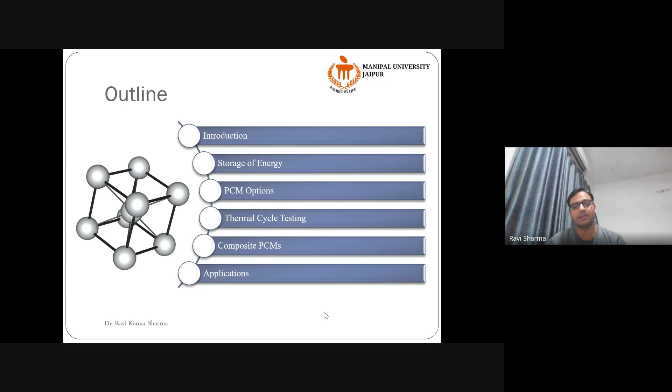This particular presentation has been structured into these few things, as you can see on the screen. I'll briefly introduce this area, tell you what storage of energy is, why it is important, and then the PCM options — PCM stands for phase change materials. I'll tell you what these are and how we use them, then thermal cycle testing of these materials, then composite PCMs, and then the applications of these materials.

A little brief of my workplace: I am currently working with Manipal University Jaipur as professor and head of the mechanical engineering department. This university was established in 2011 in the outskirts of Jaipur, and currently has more than 16,000 students on campus, more than 700 faculty members, plus 300 non-teaching staff and other people. This university has seen tremendous growth over the last decade.

This university belongs to a family with an educational background of more than 70 years. We are part of the main Manipal group, which is in the Udupi district of South Karnataka, near the coastal area. Currently, Manipal Group has many universities: three in India, one in Malaysia, one in Dubai, one in Nepal, and one in Antigua — the American University of Antigua. The Manipal Group is famous for medical and other educational institutions, so we do not have medical on this campus, but we do have science, engineering, and other aligned streams.

We do have many research infrastructures available in the university, but I'll not be speaking on them.

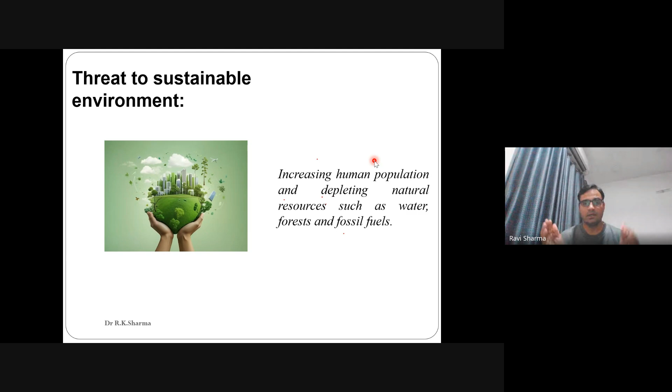So I would say that availability of renewable energy, or the utilization of renewable energy, and the storage of that available energy when it is available, and utilizing it when it is not available - if we club both of them, then we get environmental sustainability. So environmental sustainability can only be achieved when we have a combination of renewable energy sources and energy storage.

Energy storage can be mechanical, chemical, or thermal. A simple example of energy storage is your own mobile phone or laptop. The mobile phone has a battery. You charge it in the morning and use it throughout the day. How? Because it has an energy storage device - a battery. So the battery is an electrical energy storage device.

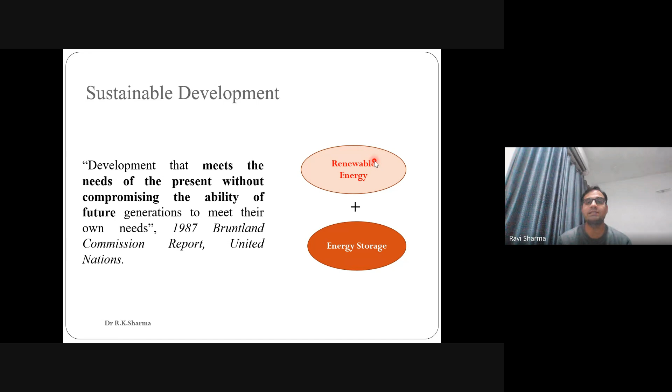During this lecture, we will be talking about the thermal energy storage part. But energy storage is energy storage - we must be able to understand that. So as I said, sustainable development can happen only when we club renewable energy and energy storage.

In order to achieve this sustainable development, in September 2015, the United Nations gave 17 goals to the world to achieve by 2030. World governments are bound to achieve these goals by 2030. I'll not be discussing all these sustainable development goals, but I'll just tell you one thing: whatever research you are doing, you are addressing, directly or indirectly, at least one of these sustainable development goals, primarily known as SDGs.

So you will find these SDGs everywhere these days. Remember that whatever you are contributing, whatever research you are doing, you are actually contributing towards a sustainable development goal, directly or indirectly. Before understanding the thermal energy storage part, we must understand the very basic idea of thermodynamics.

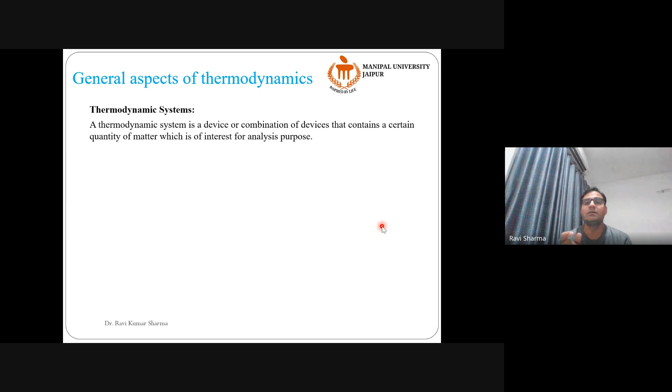I'll not take much time on that. We know that thermodynamics is nothing but the science of exchange of energy. When we talk of exchange of energy between two systems, or between system and surrounding, we need to understand what are the different types of systems available. There are three types of systems that we generally analyze in thermodynamics: closed system, open system, and isolated system.

The closed system is something in which energy gets transferred between the system and surrounding, but mass doesn't. For example, I have a cup of tea with me at the moment, which you can see. After some time, the energy will transfer out of it - this tea will get cold, but the amount of milk will remain the same for quite some time. So that means it is a kind of closed system.

An open system is something which allows both energy and mass transfer, and an isolated system is something which doesn't allow anything to get transferred. That is your thermos, in which you keep hot water or hot milk for a longer period of time. Although it has some conductivity and the energy gets transferred after some time, you can still keep it hot for a longer period.

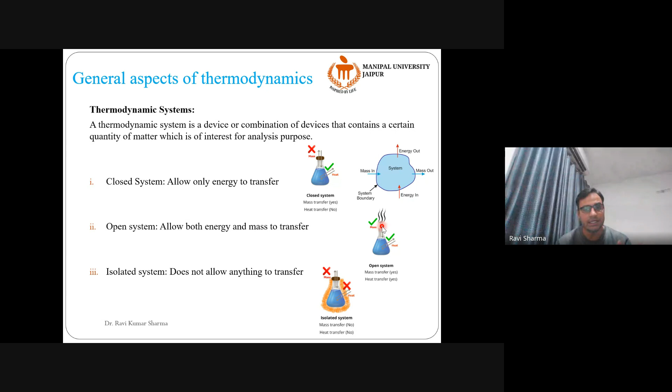So in continuation to this, what is thermal energy? When thermal energy is transferring between system and surrounding, or between two systems, this calculation of energy is very simple. You can calculate using this expression: E equals mc delta T, where delta T is the temperature difference between these two objects, m is the mass, and C is the specific heat. So this is a simple calculation I wanted to bring to your notice.

This thermal energy can be transferred in two ways: either as sensible heat or as latent heat. Sensible heat is something that we can sense - for example, we are increasing the temperature of water, and we can sense the hotness or coldness of the water. That is called sensible heating or cooling.

But when there is no cooling or heating, there is only phase change - meaning there is some hidden heat requirement to change the phase of the system. That hidden heat is generally known as latent heat. For example, the melting of ice, or the solidification or freezing of water kept in the freezer of the refrigerator - we keep the water in a tray, and after some time the water converts into ice. So the conversion of liquid to solid, or solid to liquid, or liquid to vapor, or vapor to liquid - wherever a phase change phenomenon occurs, there is a requirement of latent heat.

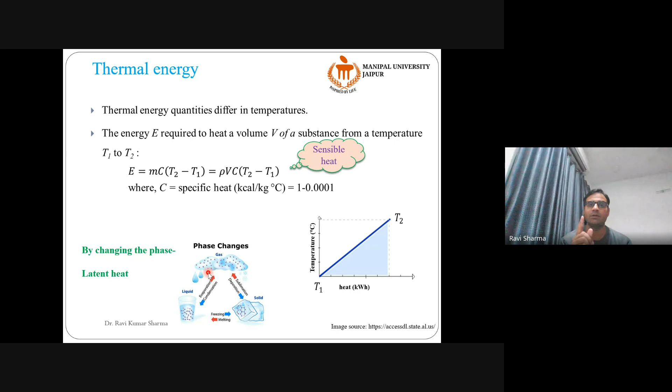So the heat can be transferred either as sensible heat or latent heat. There are materials which are able to absorb or store sensible heat, and there are materials which are capable of storing latent heat.

For example, take a simple rock or piece of stone. If you keep it under direct sunlight, after some time it gets hot. You have definitely experienced this in your life, that when you keep a small stone outside your home on the rooftop in summertime, after some time it gets warm, hot actually, very hot. That means it has stored some amount of sensible heat.

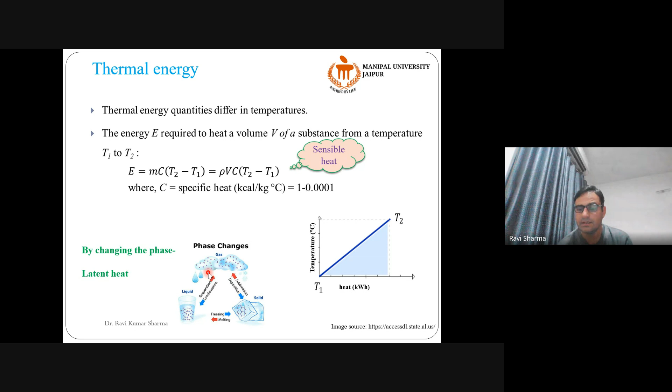Latent heat you have seen in your life many times by converting ice into water or water into ice. So we'll take this concept of sensible heat and latent heat, and I'll tell you how this thermal energy storage comes into picture, how we get the idea of it. Once you know what thermal energy storage is, you can understand the materials for thermal energy storage. So I'll spend two minutes on this before moving to thermal energy storage materials.

This classical example I have taken from the thermodynamics book written by P.K. Nag. The intention is to convert minus 15 degrees centigrade ice into 150 degrees centigrade vapor. When you want to do that, there are some phases or stages involved.

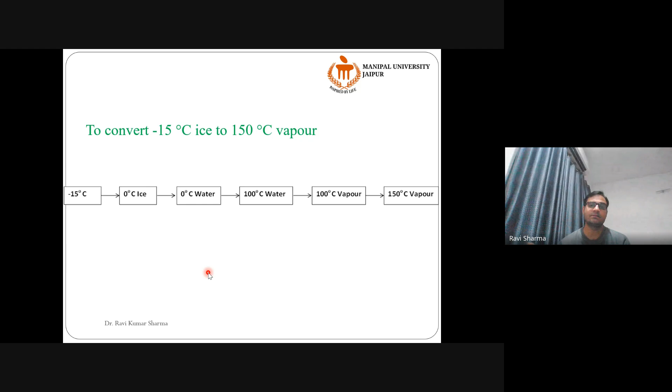These stages are: first, convert minus 15 degrees centigrade ice into 0 degree centigrade ice. Then this ice is converted into water at the same temperature. Then this water is converted into 100 degrees centigrade water. Then 100 degrees centigrade water is converted into 100 degrees centigrade vapor. And then 100 degrees centigrade vapor is converted into 150 degrees centigrade vapor.

So what are the different types of heat involved in this entire process? We'll see one by one. From minus 15 to 0, it's a sensible heating process because we can sense the hotness and coldness of it. So sensible heat will be required.

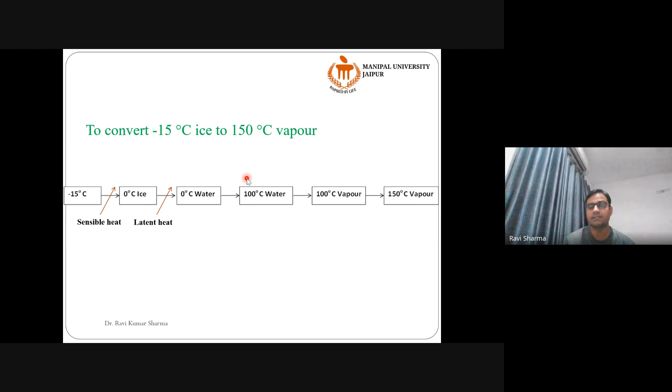But for converting ice into water at constant temperature, we require latent heat. Then from 0 degree centigrade water to 100 degree centigrade water, again sensible heat, then latent heat, again sensible heat. So you can have a look at it for a moment and understand where sensible heat is required and where latent heat is required.

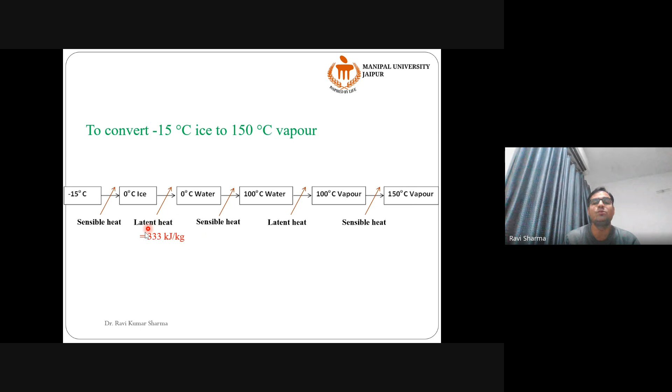Now if you do a simple calculation, the conversion of 0 degree centigrade ice into 0 degree centigrade water will require 333 kilojoule per kg of heat. If you do a very simple calculation, from 0 degree centigrade water to 100 degree centigrade water, you can use mc delta T and calculate the value of amount of heat required.

Now I have done a calculation for converting water from 1 degree centigrade to 80 degree centigrade, and the amount of heat required is 332 kilojoule per kg. So what you can see here, this latent heat is equal to this sensible heat. That means if by any means I could store this much energy, later on this energy can be utilized for heating water from 0 degree centigrade to 80 degree centigrade.

And since it's wintertime, you've observed that we all need hot water for almost every purpose at home: for cleaning, for bathing, for utensil cleaning, for washing clothes. We need hot water for everything. And the temperature we require for bathing is not more than 45 to 50 degrees centigrade, which is even a lot.

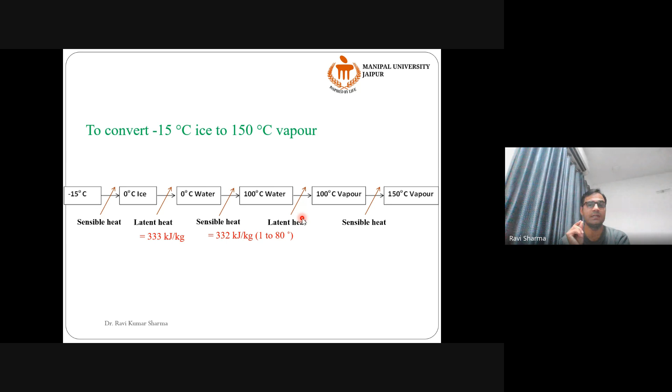For cleaning, we don't require a temperature of 60, 65 degrees centigrade. For washing also, we don't need that much temperature. That means if by any means we could store this energy, we could do all our household jobs by warming or heating up the water later on.

So this actually triggered in the scientist's mind: why can't we store this energy, because this much energy is required to heat up the water from 0 to 80 degrees centigrade. So let's store it. It might have been a vague idea when it came into their mind, but now it is not at all a vague idea.

People are actually doing it. We all are doing it.

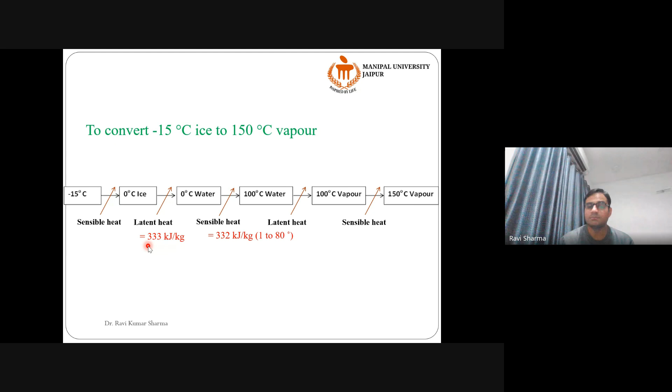So here the idea of energy storage comes into picture, and there are three types of energy storage: sensible energy storage, latent energy storage, and chemical energy storage. Sensible energy storage works by elevating the temperature, latent heat storage by changing the phase, and chemical heat storage by exothermic and endothermic reactions. For example, wherever a chemical reaction is happening, some heat is emitted from this reaction—that's called chemical heat storage.

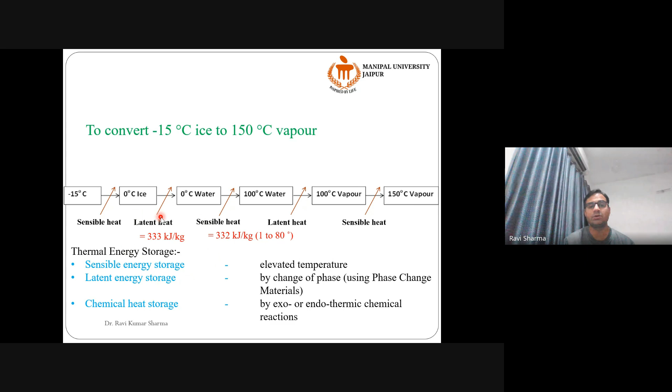So why do we need to store energy? We could understand that there is a possibility to store and utilize this stored energy, but why do we require, why do we need to store the energy?

This you can understand with this example. Just think about how much temperature your body requires in general. In the summer, when temperature goes beyond 35 degrees, we start feeling hot. In the winter, when temperature dips below 20 degrees centigrade, we start feeling cold. That means there is a temperature range in which we all feel comfortable. Generally, this temperature range is between 22 to 26 or 27 degrees centigrade. If the temperature drops below 22, we feel cold. If the temperature goes beyond 27, 28, we start feeling hot or warm. So that means there is a temperature range, and this temperature range I have kept

Now imagine the month of November. What happens in the month of November? In the month of November, days are very hot, the nights are cold. So it so happens that in the daytime we are using air conditioner and fan sometimes, but in the morning time we are using a geyser. We are using hot water for bathing, but in the daytime, for body comfort, we use the air conditioner because the temperature is very high. Because the night temperature is around 20 degrees centigrade, the day temperature is still around 35 degrees centigrade.

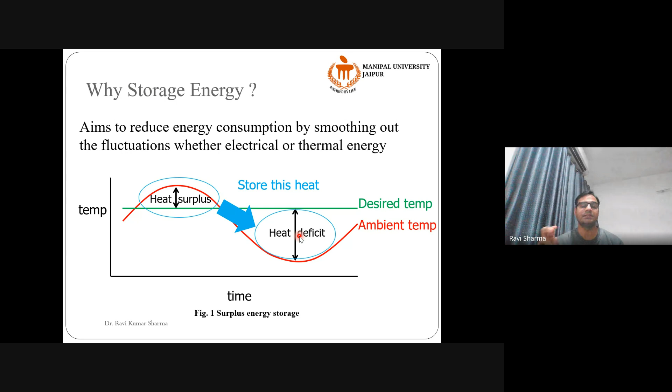So there is a huge temperature variation, which you can follow with this red line. The temperature increases in the daytime and decreases at night. So in the daytime we have a heat surplus which we don't require at all, but at night time there is a heat deficit because in the morning and at night we feel cold. So there is a heat deficit. Now what to do? Can we store this heat surplus available in the daytime and utilize it at night time? There the concept of thermal energy storage comes into picture, and that's how thermal energy storage becomes important.

So it is the same thing—why do we need thermal energy storage? We need to match energy supply and demand. We need to do peak energy saving, and ensure flexibility of the system. We can use the system many times, but there are some parameters we need to look into when installing thermal energy storage. We need to check its quality, the capacity of energy it can store, the energy density, and the power it can give us.

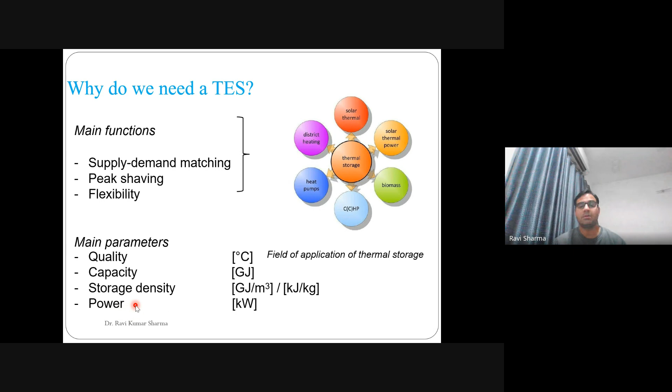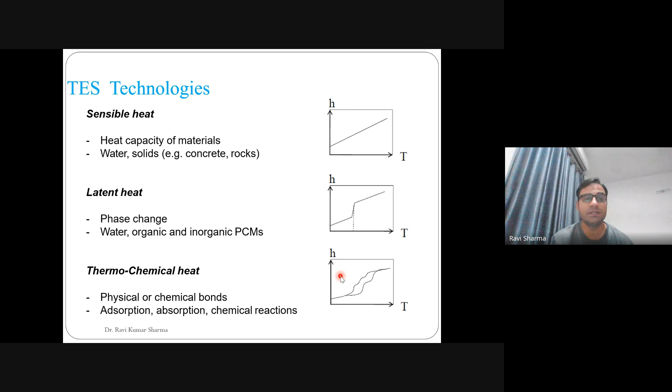So we have already discussed how sensible heat is denoted on the curve, and how latent heat and thermochemical heat are denoted—so it's a repetition of these things. Now, as I was mentioning, when we heat up something, it requires some sensible heating, then latent heating, and then sensible heating again.

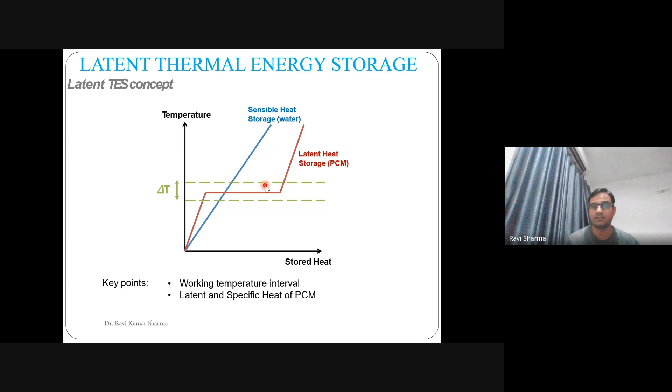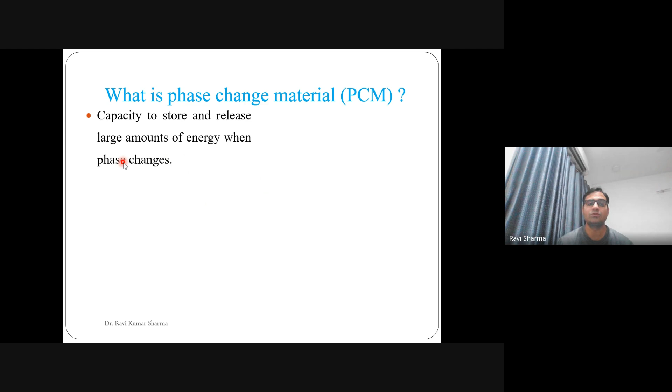So there is a portion wherein the phase changes. There are materials which are able to store energy while changing their phase. For example, ice—when we heat up the ice, it melts and changes its phase from solid to liquid by absorbing some amount of heat. So water, as a material, is able to store some energy. We call these energy storage materials, thermal energy storage materials, or materials for thermal energy storage. In generic terms, they are known as phase change materials. So the materials which change phase and store energy also change phase and release energy. They have the capacity to store and release a large amount of energy when they change phases. So look at this diagram.

This blue hemisphere, or blue circle, blue bowl—whatever you want to call it—the blue color shows the solid, and the yellow shows the liquid. So blue denotes solid, yellow denotes liquid. The solid is being converted into liquid in the first phase, and in the second phase, the liquid is being converted into solid. When the solid converts into liquid, it stores energy. When the liquid releases its energy, it becomes solid.

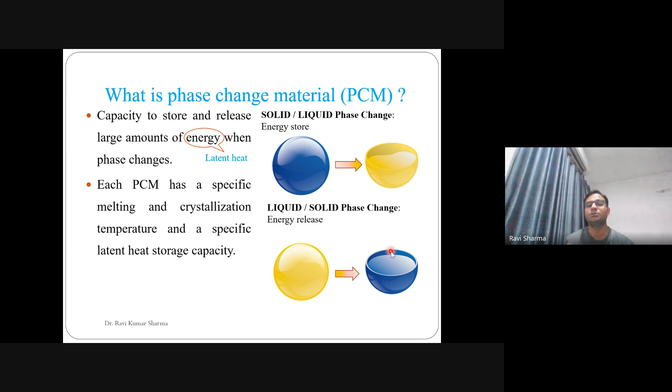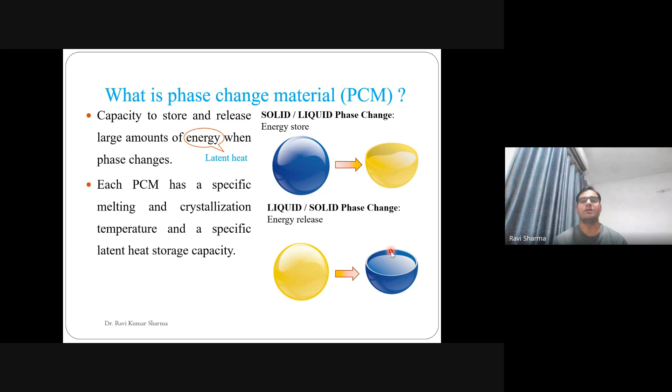The same thing happens in the case of water and ice phase change. The water releases its energy and converts into ice. The ice stores the energy and converts into liquid. So energy storage and energy release—it does both. That's why we call it phase change materials. Similar to ice, there are many phase change materials. We'll see some of them and what kind of analysis we do on these PCMs, one by one.

There is a big classification of these PCMs. PCMs are classified as solid-liquid, liquid-gas, and solid-solid. Solid-liquids are the most popular PCMs, classified as organic, eutectic, and inorganic. Organics are paraffin, fatty acids, alcohols, esters, and others. Inorganics are generally salt hydrates. Solids are polyurethane, polybutadiene, and others. We generally don't deal with solid-solid PCMs; we deal with organic and inorganic.

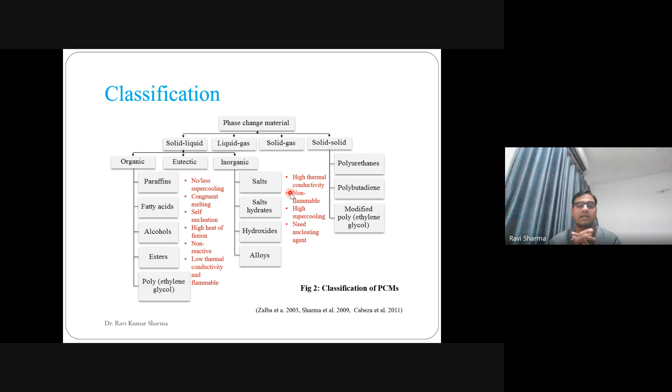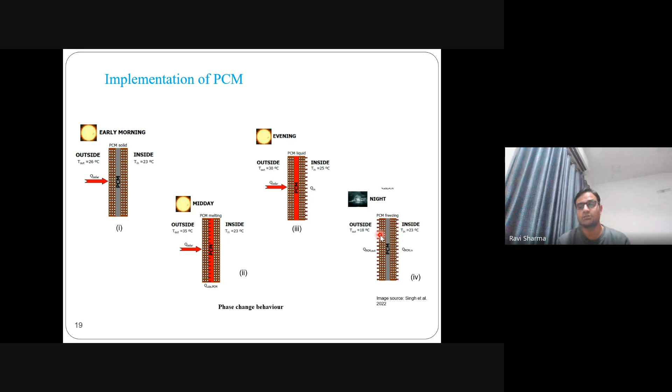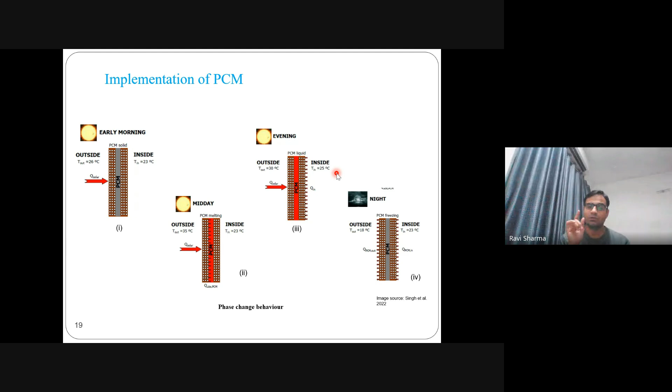The PCM will release its heat and convert into the solid phase again. So we started from solid phase, liquid phase, then solid phase again, and the cycle repeats: one, two, three, four, one, two, three, four. This is the cycle of PCM - it melts once a day and solidifies once a day, and that's how PCM works.

There are different types of organic and inorganic PCMs. PCMs can be utilized as either single or mono PCMs, or we can also prepare eutectics of them.

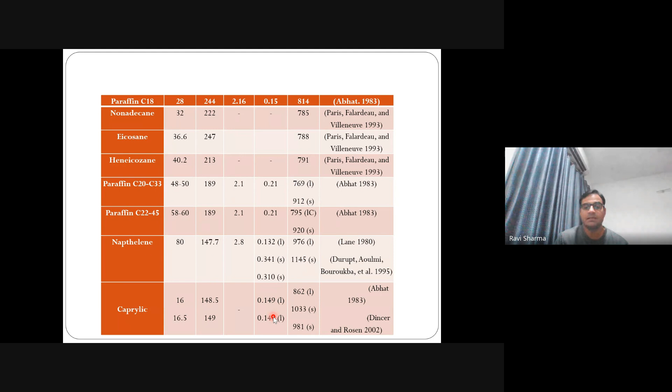You can see some organic materials and their properties shown here: their melting temperature, their latent heat of fusion, their specific heat, and their conductivity. You can see the conductivity is very low. Water, an inorganic material, has conductivity of 0.6. Octadecane, an organic material, has conductivity of 0.15. So the conductivity of all organic materials is very low - paraffin 0.2, naphthalene very low again, caprylic acid very low again, and all of these are organic materials with very low conductivity.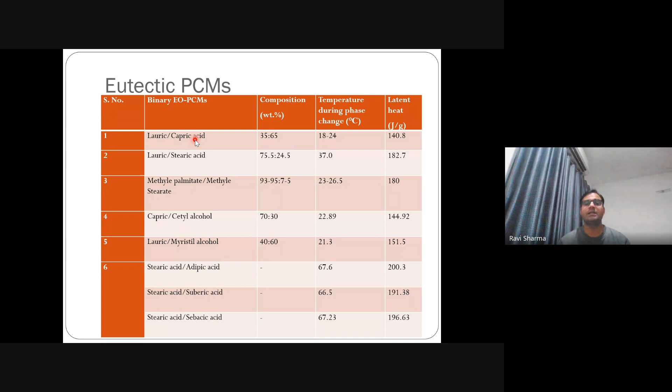PCMs can also be prepared as a eutectic - we mix two or three PCMs to come up with one single material, in order to tailor their melting point. For example, suppose I have two materials available at two different melting temperatures, one at 40 degrees centigrade, another at 45 degrees centigrade. But my application requires a material with a melting temperature of 42 or 42.5 degrees centigrade - a very peculiar temperature that isn't available. So what we do is mix the two materials in different ratios until we find one with a melting point of 42.5. That's how we prepare the eutectic. It can be binary, ternary, or more, depending on material availability and the requirement.

When utilizing a PCM, it must have certain properties: high latent heat, high specific heat, high thermal conductivity, high chemical and thermal durability, longer chemical stability, and it should be non-toxic, easily available, and inexpensive. These are the favorable properties it should have.

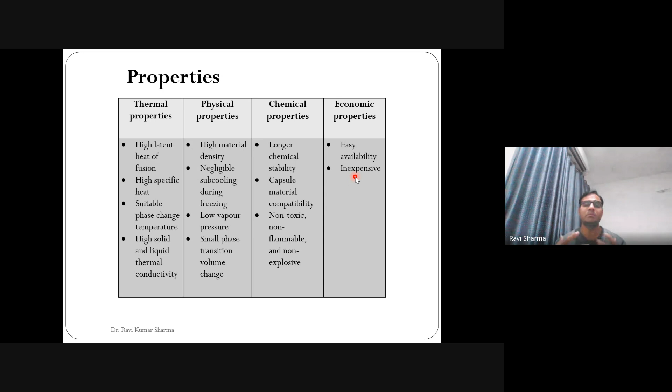Okay, now generally what we do with PCM - let me check the time, please. All right, we still have time. So,

First, we do thermal cycle testing of PCM. This is basically done to check their thermal durability and chemical durability. As discussed, a PCM will melt once a day and freeze once a day - so how long can we use these materials? When it changes phase again and again, after some time its properties will deteriorate. So how much depreciation it will experience is important - after one year, two years, or five years of use, what will be the latent heat, the melting point, and the conductivity of this material? This kind of melting and freezing treatment is done using thermal cycle testing, and for that we have developed an in-house tester at my current university.

The second part we work on is that organic materials have very low thermal conductivity, so some treatment is required to enhance it. One example is the nano-enhanced PCM, where we mix nanomaterials with organic PCMs to enhance their thermal properties. I'll show you one by one how we do that.

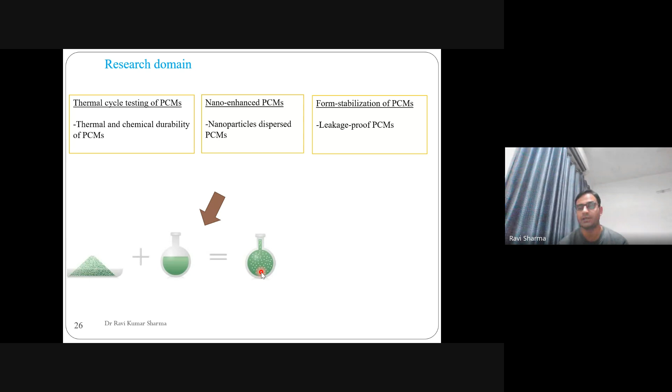Then for form stabilization, what we do is take a porous matrix, or a porous material. Into the pores of these materials, we add PCM by a rigorous mixing process. Once this PCM gets settled into the pores, after getting melted, the PCM remains in the pores. What you can see on the right hand side, we call FS-PCM, form stable phase change material. So when the material gets melted, the PCM is retained into the pores, it doesn't flow away, it doesn't come out of this material. Because of that, it is known as shape stabilized, because it keeps its shape retained, or form stabilized, keeping its form very much stabilized.

So we have tested a number of PCMs for that. We have tested various paraffin wax, palmitic acid, myristic acid, polyethylene glycol of different molecular weight. I have just added one here, but we have tested like 7-8 types of different molecular weight polyethylene glycol. We have also tested the esters that I'll show you. I'll show you some of the results for you to have an understanding of this PCM.

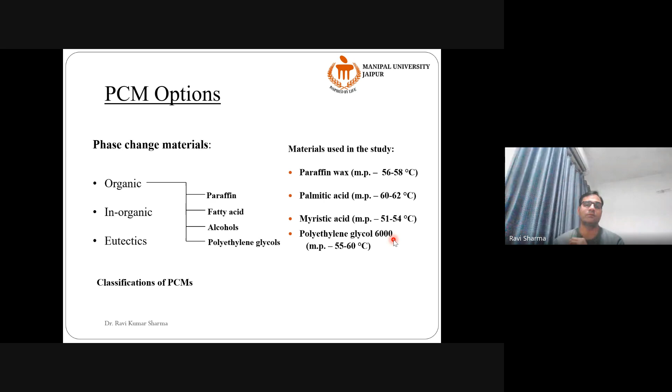The temperature was between 30 to 100 degrees centigrade. As I was mentioning, it will go from 30 to 100, 100 to 30 on its own, without any human intervention. So we did it for 1500 melting and freezing cycles non-stop.

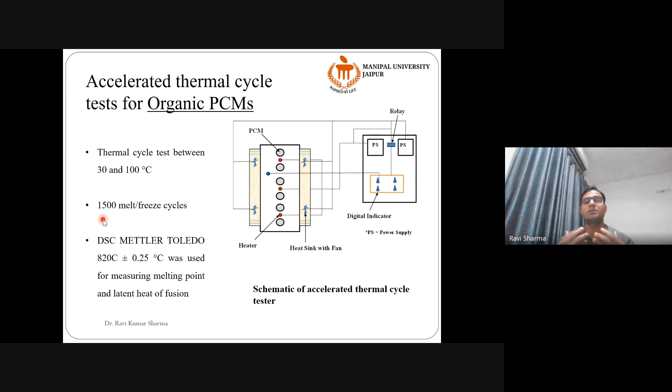It took around 2.5 months to complete this entire 1500 cycle. Then we tested using different machineries to analyze the effect of this thermal cycling on the thermal properties. So what thermal properties do we analyze?

As I said, one was latent heat and the conductivity and the chemical stability of these materials, whether the material was chemically stable or not after 1500 cycles. What happened to its chemical bondings, the functional bondings of these materials. We'll see that one by one.

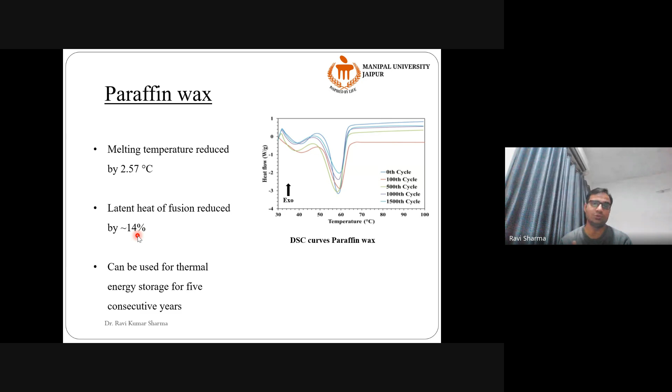Because this is the laboratory test, in an actual experiment this might be a little different. But roughly, we can say that 14% of its latent heat will go waste, will reduce. But 86% is still there. That means the material can be very well utilized or used for continuous or consecutive 5 years.

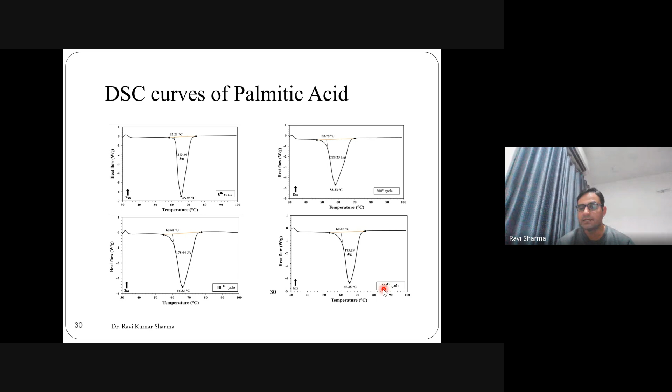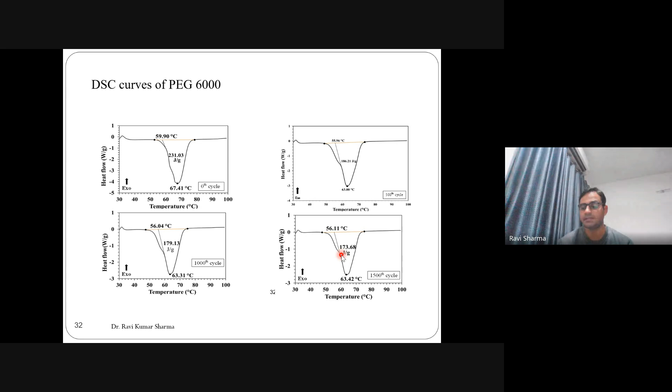I have tabulated these values. So now this gives you a comprehensive understanding of how thermal properties changed over the period of time. As you can see, the melting temperature of paraffin changed from 52.9 to 50.33, for PEG from 59.9 to 56.11, and so on you can see.

The variation in latent heat in the case of paraffin was from 133 to 114, that means 14% reduction. In the case of palmitic acid, it was 17.88%, roughly 18%. In myristic acid, only 0.64%, but in the case of polyethylene glycol, it is roughly 25%.

Now, as an application engineer, what do you want? You want your material to lose the minimum amount of latent heat after a certain number of cycles. And that's what is happening in myristic acid. After 1500 melt-freeze cycles, it loses just 0.64% of its latent heat. So as an application engineer, you can tell your customer that myristic acid is the best material out of these four because it doesn't lose its latent heat capacity over a period of 5 years. And polyethylene glycol is the worst material because it has lost 25% of its total latent heat capacity.

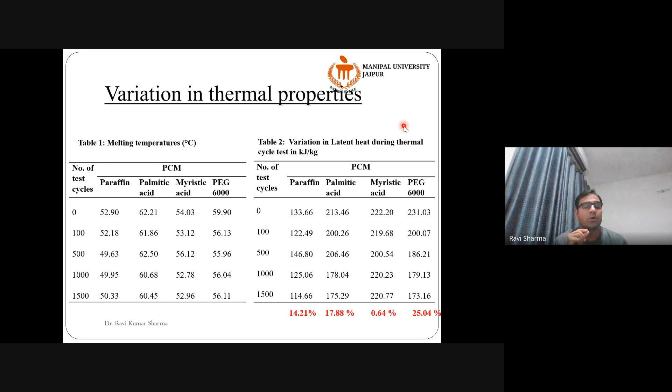That means, being a real application engineer, I can tell my customer that I am giving a guarantee that polyethylene glycol will definitely lose 25% after 5 years. But I cannot guarantee on myristic acid, palmitic acid, and paraffin because their behavior is like a sine wave - increases, decreases, increases, decreases. I cannot comment on its applicability and durability. So your customer will understand that PEG has trustworthy values. I can trust PEG. Now it's up to me whether I want to use it for a year, 2 years, 5 years, or 10 years. But I know that after 5 years it will lose 25%. Still, if I can manage with 75%, I'll go with it. But I cannot trust myristic acid, palmitic acid, and paraffin. So a real application engineer has to see the pattern of these values.

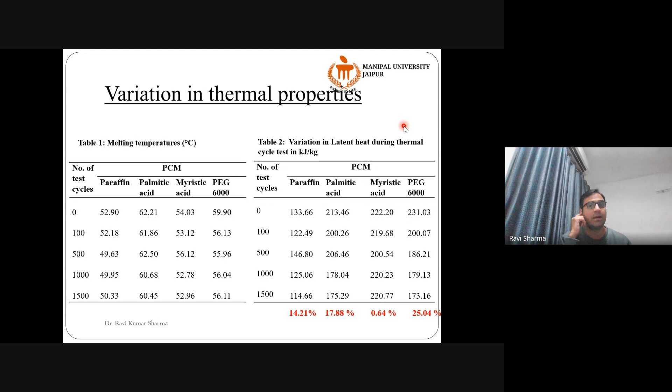These are FTIR curves - Fourier transform infrared spectroscopy. These curves basically tell us about the functional bonding of these materials. You can spend a few moments with it and see what is happening after 1500 cycles of each. I won't go into more detail because this is deep chemistry which might bother you. Just look at the peaks - you can see that the shape of peaks after 1500 cycles is almost similar to what it had at the 0th cycle. That simply means there are no changes in the functional behavior of these materials after 1500 cycles. Chemically, the material is very, very stable. Thermal stability we see here, chemical stability we see here.

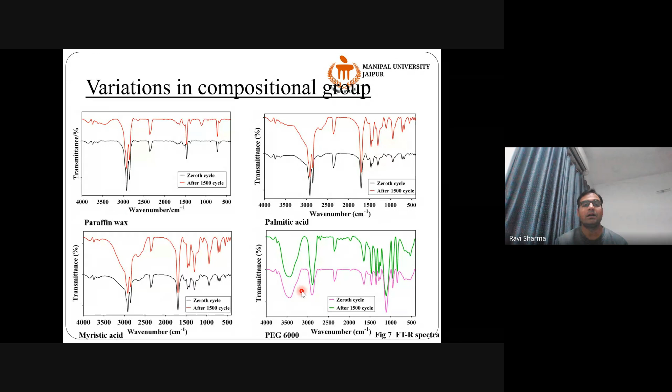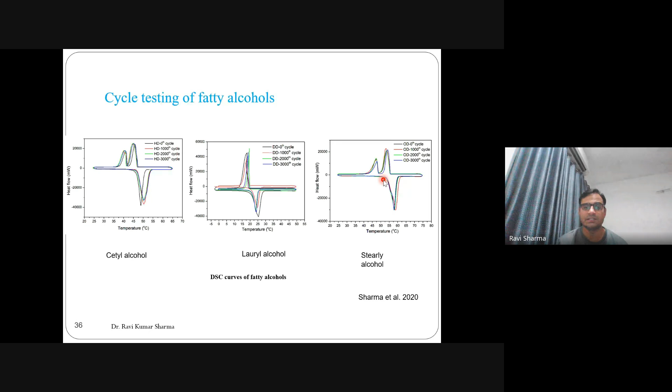We also did thermal cycling of fatty alcohols - cetyl alcohol, lauryl alcohol, stearyl alcohol - using the same setup for 3000 cycles. You can see that even after 3000 cycles, the variation in latent heat and melting temperature is almost negligible. So these are very, very good materials.

Now coming to the properties enhancement of organic PCMs. Organic materials have very, very low thermal conductivity. There are ways to enhance its thermal conductivity - we can add nanoparticles, we can develop form-stable PCM, we can do surface modifications, we can develop eutectic PCMs, we can also encapsulate them into a container or small capsules. So some of these things can be done for thermal performance enhancement of different PCMs. But we need to understand why do we need to do that? Why do we need to enhance the thermal properties or conductivity of a PCM?

To understand that, let me tell you one very basic thing. These days the temperature is pretty cold everywhere, especially in North India, the eastern part of India, and the central part of India. So if you are feeling very cold, you get home, you are feeling very cold, you wear all those clothes, still you are feeling very cold. At that time, what do you want? You want a good heater to warm your body immediately, as early as possible, maybe within 5, 10, or 15 minutes. You cannot wait for an hour or 2 or 3 hours to get your body warm.

Because if you have to wait for two hours to get your body warm, then the purpose of heating gets diluted. So I want the heat to be transferred from the heating object to my body at a very rapid speed, a very rapid pace.

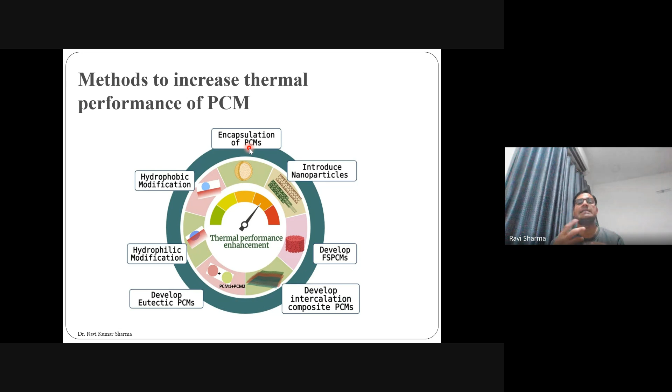This can also be understood in a very layman language. If you have a metal bar, one side of it you put to the fire, the other part will get warm, hot very soon. But at the same time, if you have an asbestos sheet or rubber material or wooden piece, one side of it is under fire, the other part doesn't feel hot at all. That means its conductivity is very low. You don't want that kind of effect on your body when you are feeling cold. You want a metal bar kind of heat transfer. That means we need higher thermal conductivity to do that.

So how do we understand the thermal conductivity effect on the material? One way is that you check the conductivity using a thermal conductivity testing apparatus.

The other way to do it is we plot a time-temperature curve, or temperature-time curve. Just look at these two curves, the red curve and the black curve. The red line goes up and then comes down, so it makes a mountain. That means, let's say, it starts with a temperature of 35 degrees centigrade. It's basically a material's line, a simple PCM. A PCM starts getting heated up till this point.

Let's say this is the charging time, meaning the melting period, and then this is the solidifying period. So one complete melting and one complete freezing takes approximately 70 minutes, from 0 to 70 minutes in the case of PCM, following the black line. So a pure organic PCM is roughly taking 70 minutes for one cycle of heating and cooling.

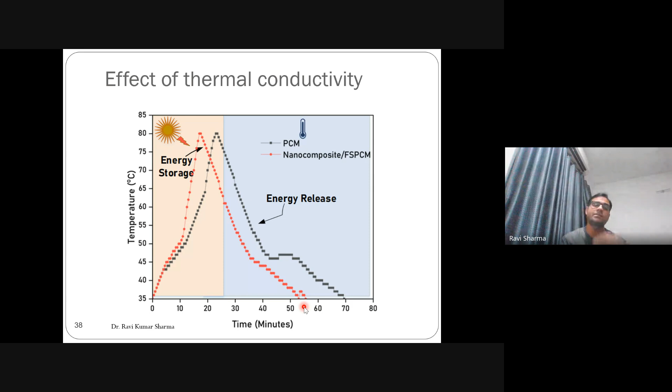Now, if I add some nanoparticles into these materials, I know its conductivity should increase. If its conductivity increases, the entire melting and freezing time should be lesser than the pure PCM time. That's what happens here. If you follow the red line, the entire melting and freezing cycle takes roughly 55 minutes. So there is a reduction of 15 minutes after addition of nanomaterials, or by developing a form-stable PCM, from 70 to 55 minutes. So there is a reduction in the time, and that's what we want. That is the effect of high thermal conductivity.

So thermal conductivity can be increased by inserting metal matrix, fin tubes, nanoparticle dispersions, etc. There are many ways to do that. So we did many experiments for thermal conductivity enhancement. I'll explain one of them here quickly.

We took palmitic acid as a PCM. So PA means palmitic acid. This palmitic acid was kept on a hot plate. It was melted, then the nanoparticles were added using a sonication process, and then it was solidified.

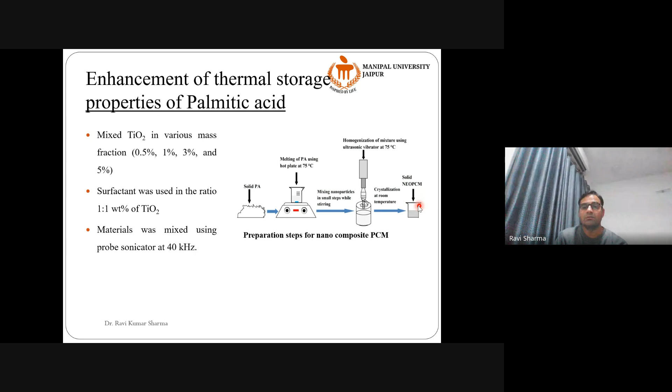Now, thermal properties measurement. We developed four different kinds of nano-enhanced materials: 0.5% addition, 1% addition, 3% addition, and 5% nanoparticle addition.

When we do that, let's see what happens. The latent heat of pure palmitic acid was 213.46. Once we add these nanoparticles, the latent heat decreases. If we keep increasing the percentage of nanoparticles, the value of latent heat keeps decreasing. This is easy to understand, because the specific heat of PCM was high, and the specific heat of nanoparticle was low. When you mix these two materials, the net specific heat comes down.

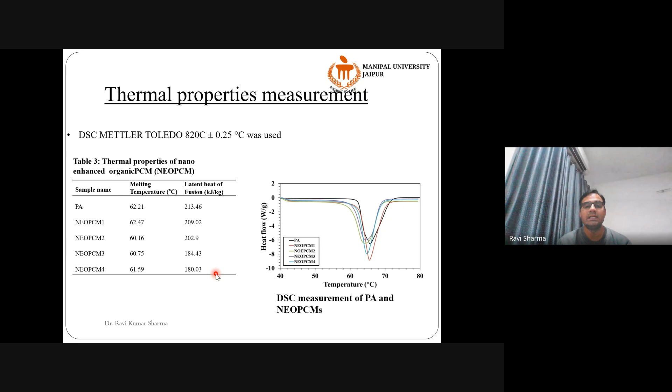These nanoparticles will bring the specific heat of the PCM down, which means the latent heat of the effective composite will be lesser compared to the pure PCM. As we keep increasing the amount of nanoparticle, the latent heat will keep on decreasing. These values were obtained from the differential scanning calorimeter thermogram.

Now what happens is the thermal conductivity. So how was the thermal conductivity enhanced? As you can see, we added different percentages of nanoparticles, and there was an enhancement in thermal conductivity. After addition of 5% titanium dioxide or titanium nanoparticle, the conductivity of palmitic acid was enhanced by almost 80%. Earlier it was somewhere around 0.19 to 0.219, and after addition of 5%, it became 0.35. That means if we keep adding nanoparticle, the conductivity will keep increasing.

But there has to be a bar on the amount of nanoparticle addition. We cannot add more than 5%, as the problem of agglomeration or sedimentation of the nanoparticles will increase. So addition of even 3% is a lot. Generally 3% to 5% is the maximum amount of nanoparticle addition; we shouldn't add more than that.

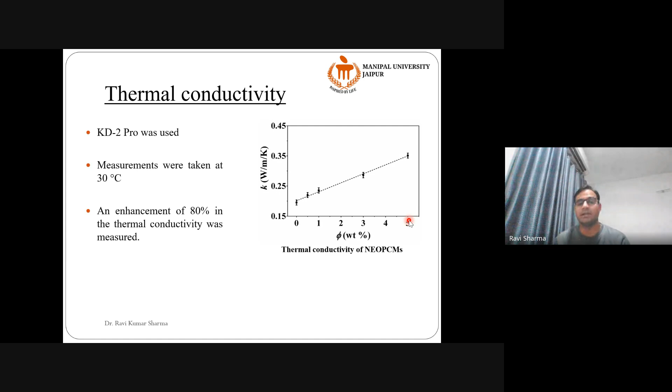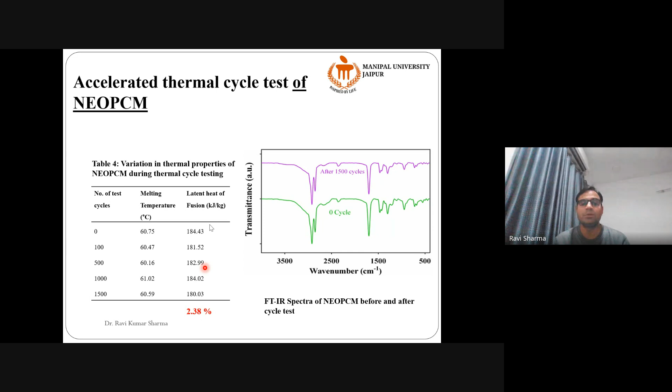Then this is nothing but the thermal stability of nanoparticle-enhanced PCM. When we add nanoparticle into the PCM, the thermal stability of PCM increases. A thermal cycling test was also done for this material for 1500 cycles, and the material was pretty stable. Even after 1500 cycles, only 2% of the latent heat was decreased.

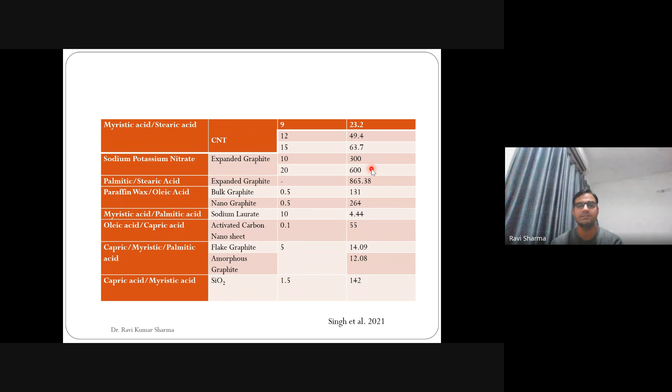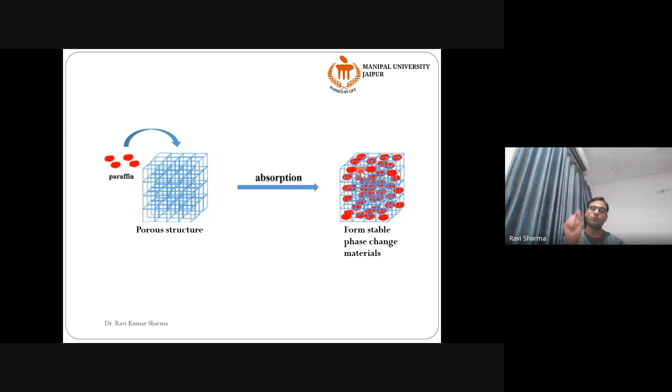So the last part of my research domain is development of form stable PCM. We develop different types of form stable materials by adding phase change materials into porous materials. This is the concept we had already discussed earlier, that the PCMs are added into the pores of these materials, and then after some time it becomes something like this. The PCM gets entrapped into the pores of these materials, and we call it form stable PCMs.

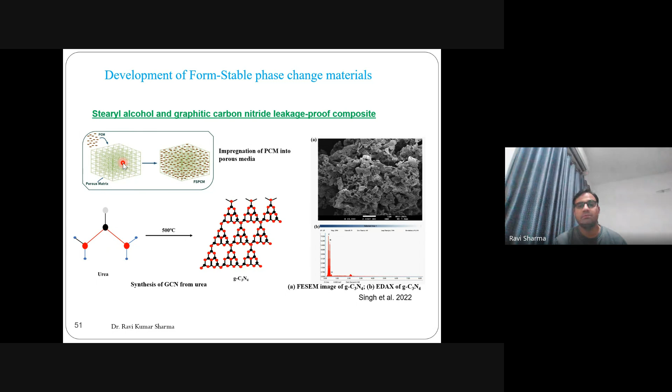If you look at it critically, you will find holes in this material. These holes are nothing but the pores in which the PCM will be impregnated. The PCM will be impregnated into this kind of hole.

This was the process we followed, called the vacuum impregnation method. In this method, vacuum is created into the beaker, and the graphitic carbon nitride was added in small parts into the liquid PCM, and then it was rigorously stirred.

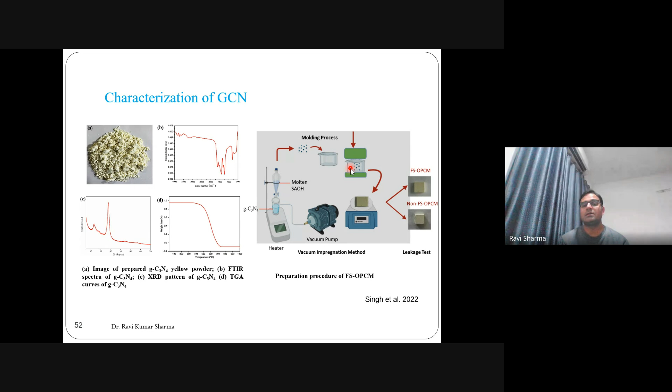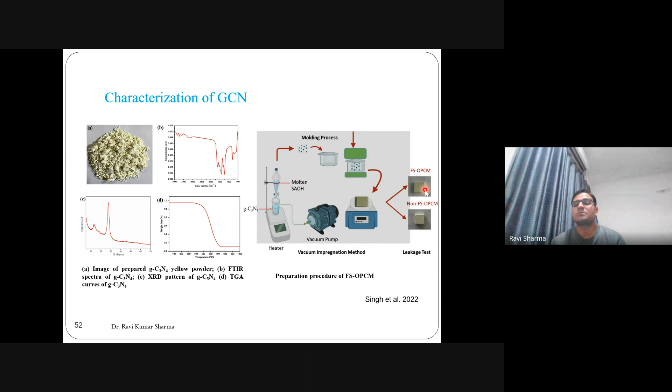It stood for about 1.5 to 2 hours, then after stirring it was allowed to solidify. After solidification, after freezing, what we got is this. We call it FSPCM or FSOPCM, meaning form stable organic phase change materials, or simply form stable PCM. It is a mixture of fatty alcohol, organic PCM, and graphitic carbon nitride. Then the thermal properties were determined.

This is the leakage test we carry out to understand whether there is any flow in the molten state. Stearyl alcohol, SaOH, and g-C3N4, the graphitic carbon nitride, were combined: 65% PCM was added into the graphitic carbon nitride, then 70% PCM, then 75% PCM.

It was kept at a certain temperature, higher than the melting point of the PCM. What you can see on screen is some impression around it, which is nothing but the molten PCM. When 65% and 70% PCM were added, there was no leakage at the same temperature, but when the amount of PCM increased, there was leakage. So we can consider this composite as the optimum composite for thermal energy storage purposes.

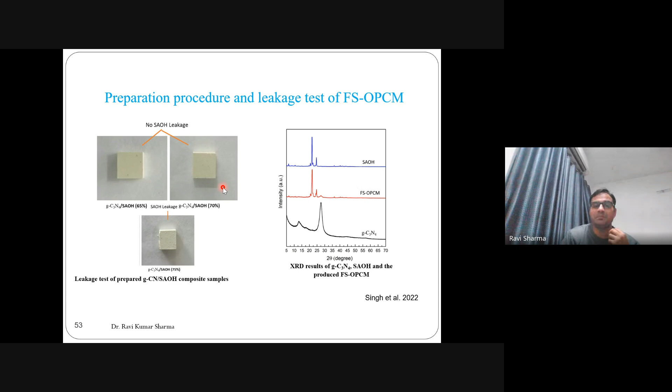At the same temperature, the pure PCM melted, but this composite did not melt, meaning form stabilization or shape stabilization has been achieved since the PCM is not melting at this point. Then some thermal characterization was done on the stearyl alcohol and form stable PCMs using differential scanning calorimetry, and the latent heat and other values were found.

Thermal conductivity gave a very interesting result. Graphitic carbon nitride is a simple carbon material, but it's a yellow carbon material with higher thermal conductivity. Once added into the PCM, the thermal conductivity was enhanced, almost doubled, from 0.22 to 0.49. When it is doubled, it takes less time to complete one melting and freezing cycle.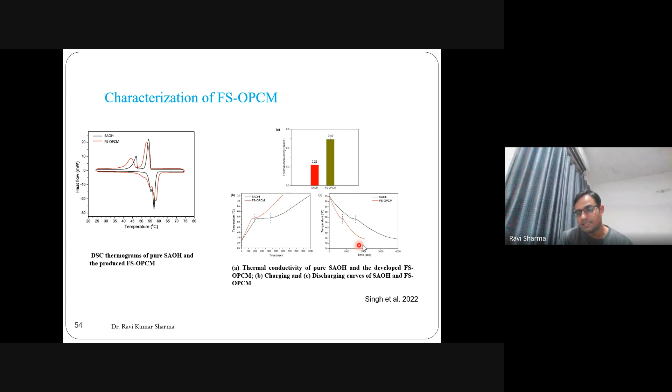Follow the black line for pure PCM and the red line for composite PCM, FSPCM. The composite PCM takes lesser time for one complete melt-freeze cycle. The thermal cycling test was also done for 1000 cycles, and the material was thermally and chemically stable after 1000 cycles.

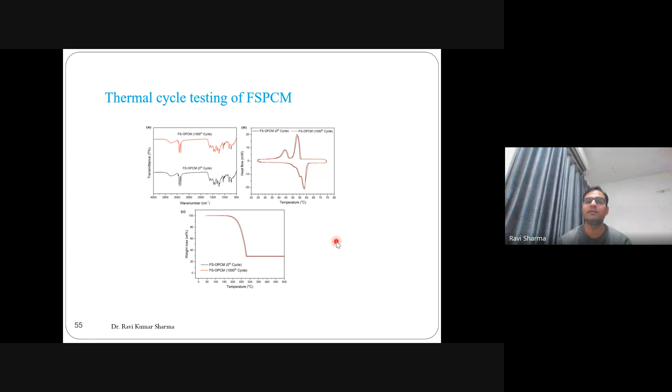There's another work that we did, with coffee seeds. After preparing the coffee, the seeds are thrown away. We collected those coffee seeds and did pyrolysis, converting them into biochar, which we then activated to increase the surface area of the pores. Then the PCM myristic acid was added to enhance the thermal conductivity further.

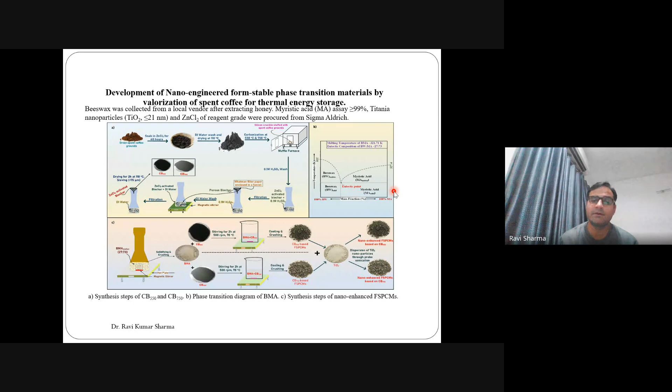A nanoparticle was also added into it. It's a complex procedure, very difficult to explain here, and it will take a lot of time if I keep explaining it. But yes, this is another work we carried out very recently, already published, and it gave a fantastic result.

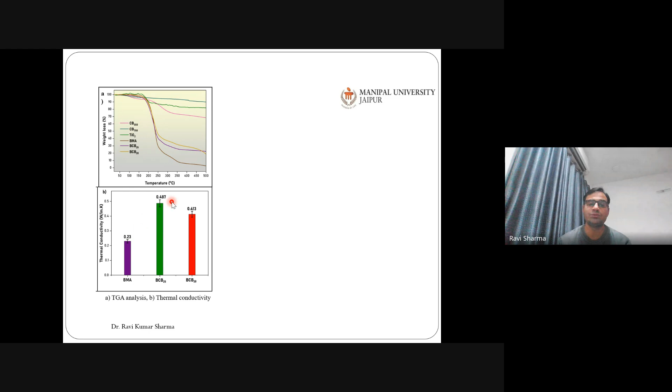The thermal conductivity was enhanced, almost doubled again, from 0.23 to 0.487, and the thermal properties were also very nice. The latent heat of pure PCM was 175, and the composite PCM was 98 and 111 for different percentages of porous materials.

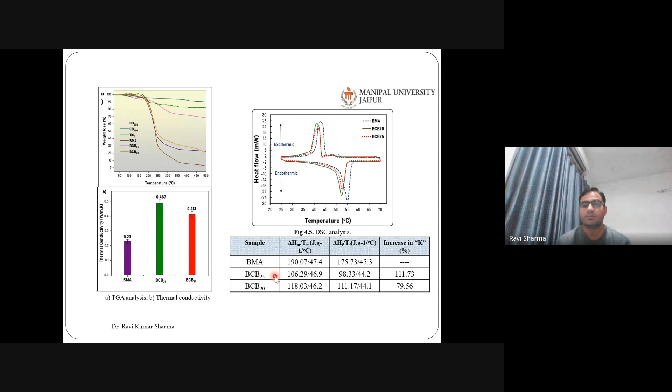That was the other work we had done. We took date seeds and converted them into biochar. Interestingly, these date seeds were provided by the organizer of this FDP, Dr. Abhishek Sharma. Thanks to him.

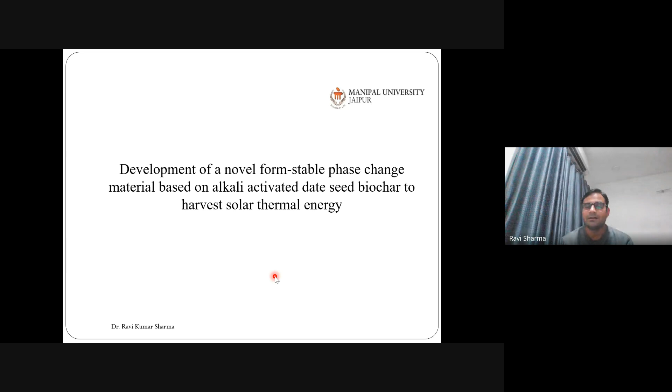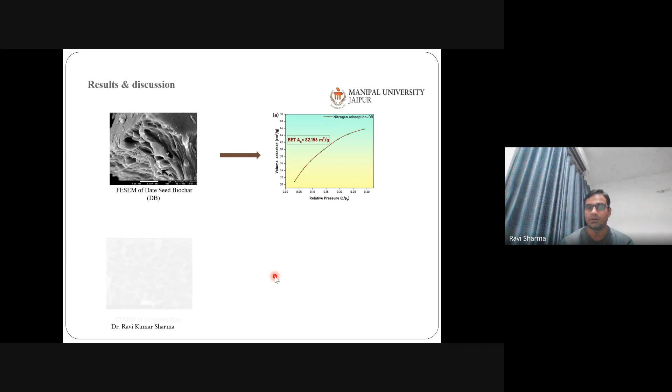We converted these date seeds into biochar, activated them, and converted them into very good porous materials, finding some very good form stable PCMs. All these works have either been published or are in the process of publication. After activation, you can see the pore size has increased a lot, which is what we want so that the maximum amount of PCM can fit into it.

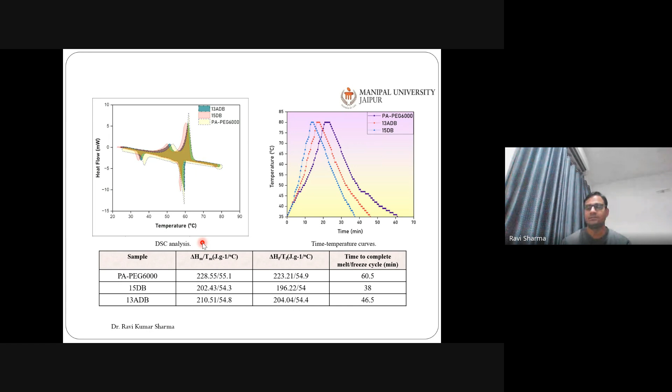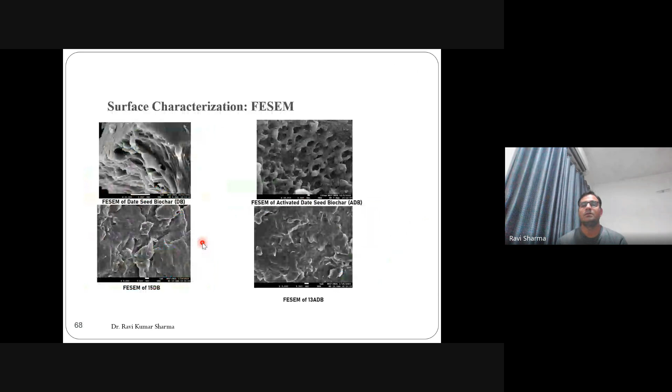So there are a lot of similar works with different results and different materials. I'll not explain all of these. Some bio waste materials were also utilized. We also utilize MXenes for thermal conductivity enhancements. So many works have been done, and this is the repetition of date seed biochar, we already seen that. These thermal energy storage materials have found their applications in almost every kind of industries.

In the textile industries, smart apparels are manufactured. These smart apparels are nothing but clothes for athletes, because athletes sweat a lot, so they want their clothes to absorb this sweat. These PCM based clothing are able to do that.

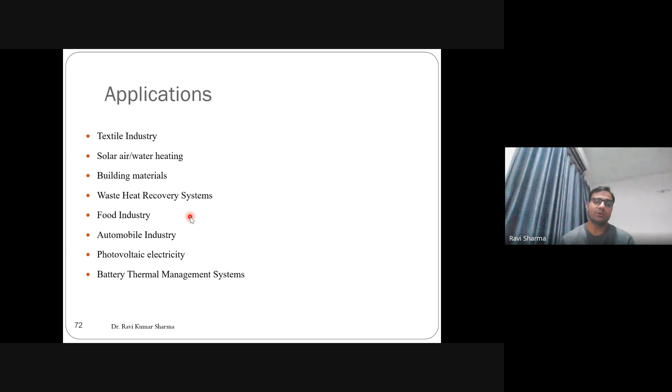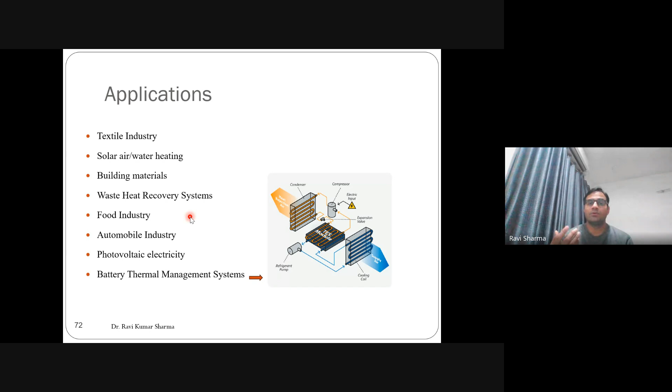Solar water heating and air heating systems have also utilized many PCMs. Building materials and many waste heat recovery systems have also utilized PCM. Food industries have also seen use. Automobile industries, EV cooling system, battery cooling system, photovoltaic electricity - these days photovoltaic panels are integrated with PCMs for efficiency enhancement, and the battery thermal management system. So there are many applications.

So thank you, Dr. Ravi, and thank you very much. Thank you, sir. From basic to advanced level, and even your practical experiences and practical applications of phase change material you have discussed. Really, I'm very much thankful for enlightening us, sir.